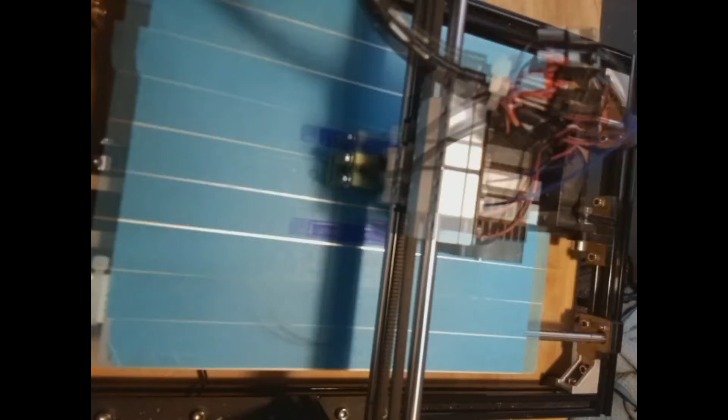This first one, we're going to make a strain relief for that cable coming into the connector on the bottom left hand corner of the heated bed. Had a bit of a mishap after months of use, where one of the red cables went into that block, and it actually snapped off, so this is hopefully going to sort that problem out.

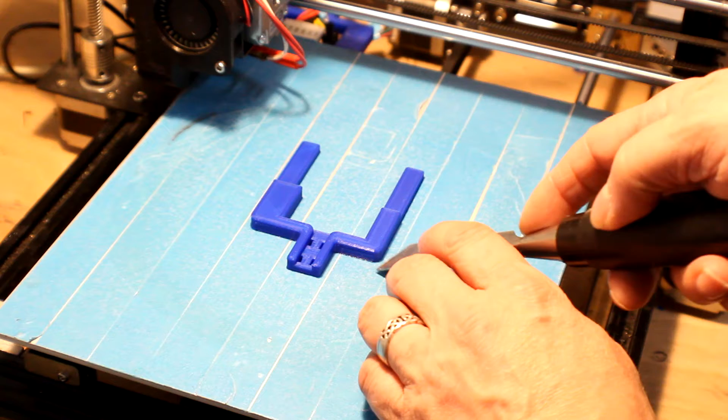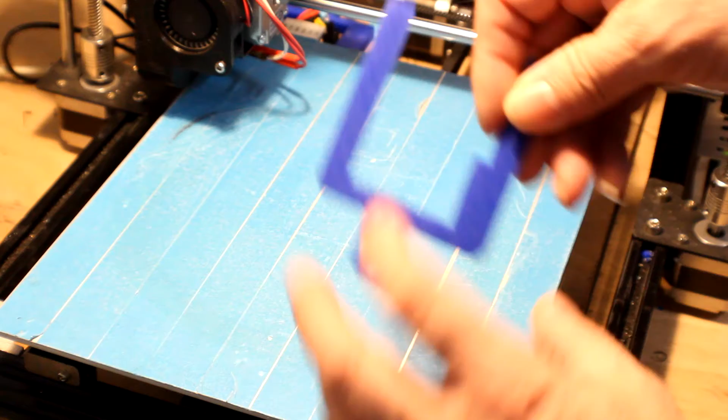Okay, there we are. This one there. We'll super glue these edges and just move that over. That'll go there, but on the other side where the cable is. So let's just get that done.

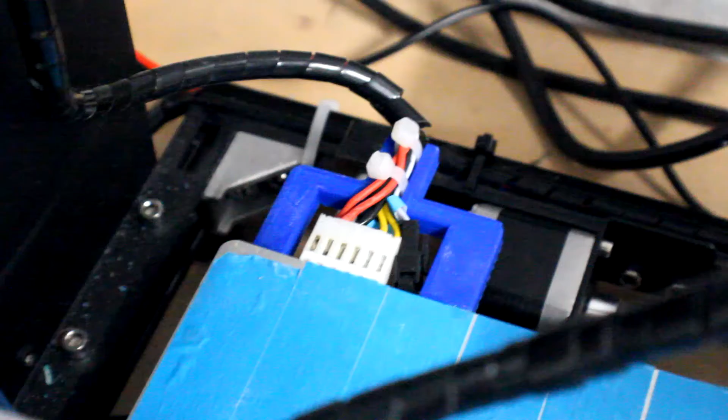Right, so I've got that fitted. I have to use a couple of clamps just to hold this onto the bottom of the heated bed whilst the super glue set, and use cable ties there, which means the tension is now on the other side of those rather than at this joint here, so we shouldn't get any more cables coming loose on that connector, which is good news. There we are, another successful print.

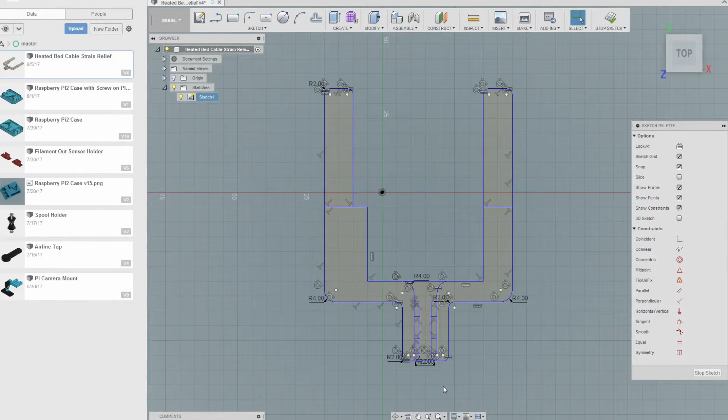So as I've worked on this, I've also been thinking about the various extrusion levels I'll need, and I've segmented up the diagram so I can achieve that. These areas here will essentially be glued underneath the bed. This area here will be the main strain bearing component, and then we need a channel for our cable in this area, and two slots on each side of this channel so we can put a zip tie through to zip tie the cable.

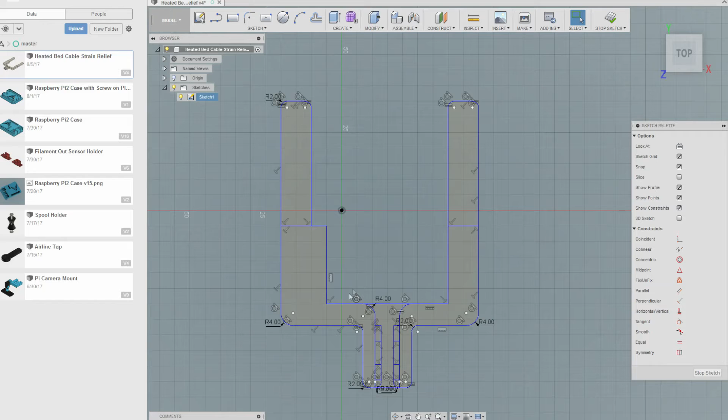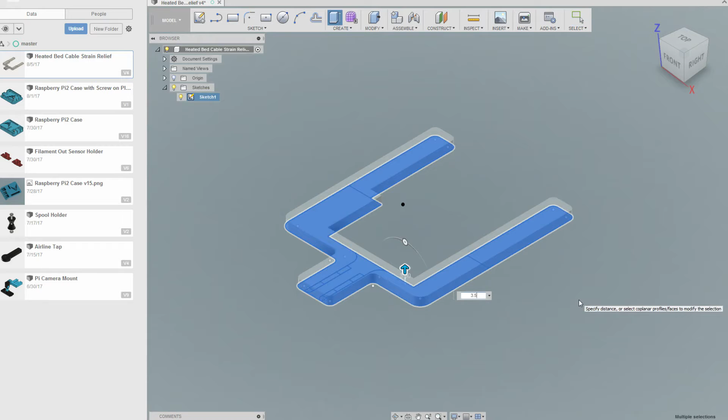I've measured the connector block which fits into this area, and there's also one of the limit switch connectors that also needs to fit into this area. Okay, so we'll stop the sketch and then start extruding. Let's move that into an isometric view. So the first thing we're going to do is select everything and extrude the whole thing by 3.5mm. That should give us a nice platform to work from.

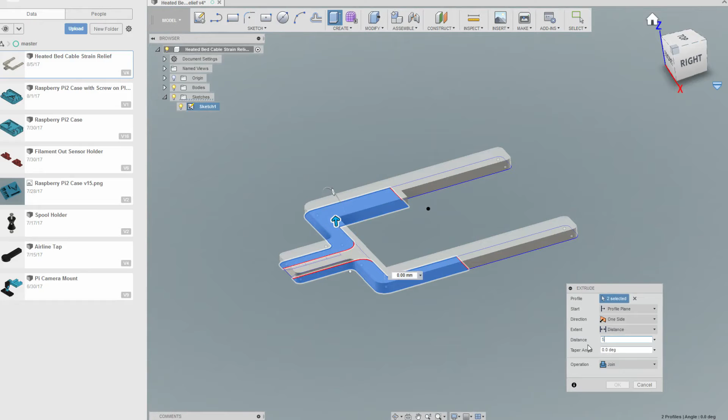Then we need to extrude these areas here, a couple of mil higher, so I'll make them 5.5. Let's do that now. Now it wants to create a new body, but I'm not going to do that. I'm going to do a join, and if we do 5.5mm, that'll bring that up nicely. It leaves a little channel in the middle here.

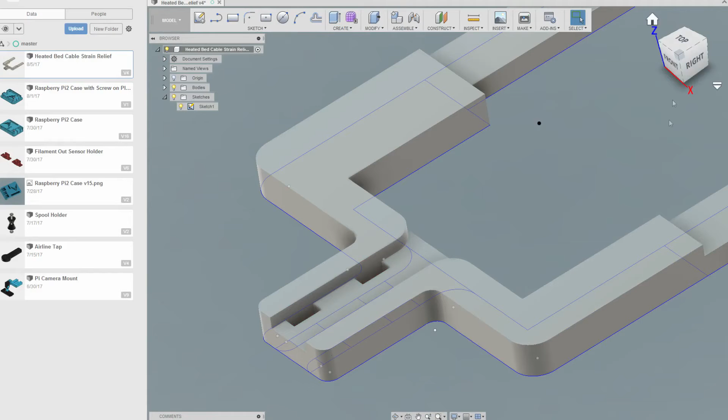The last major body work we need to do is extrude these 4 slots all the way through. So if we select, say, 6mm, that's already changed to a cut. So just do that, and there we've got slots in place that we can put cable ties to and cable the connector block bundle of wires into this channel, and therefore the strain will be over in this area on the cable, rather than where it's going into the cable block connector and the crimps behind that.

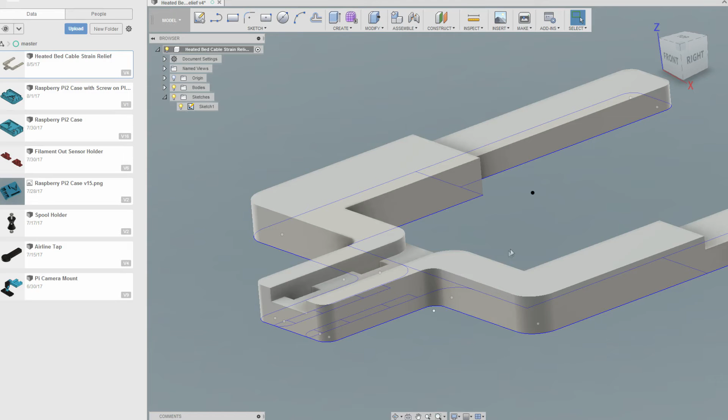Okay, then I think all we need to do now is put some fillets, so we can round out some of these corners. Press the F key, choose some of these edges, so I think we'll fillet all of those edges.

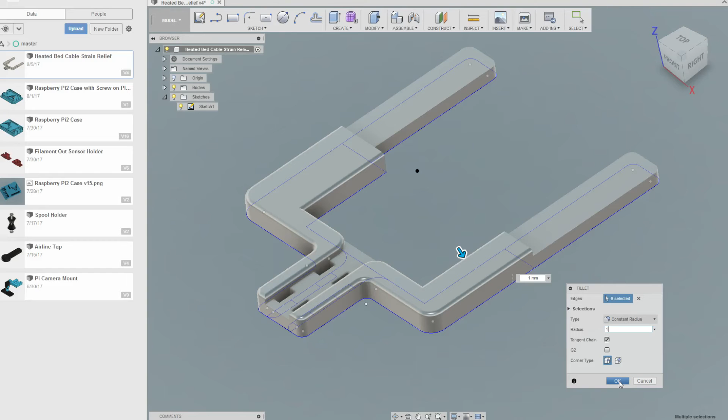Actually, we won't do that one, and we won't do that one, because this is going to be flush up against the plate, so the build plate will be in this area. I think we'll just try a 1mm fillet, that should be nice enough. Click on OK, and we'll see if we can fillet this area here, because we don't want any sharp edges where the actual cables are running. So let's try that one and that one. Do a 1mm. Oh yeah, that's nice.

And I might do that one there as well if we can. There we go. Possibly. Oh no, we can't do a 1mm fillet on there. We'll just use a 0.5mm one, that should be sufficient.

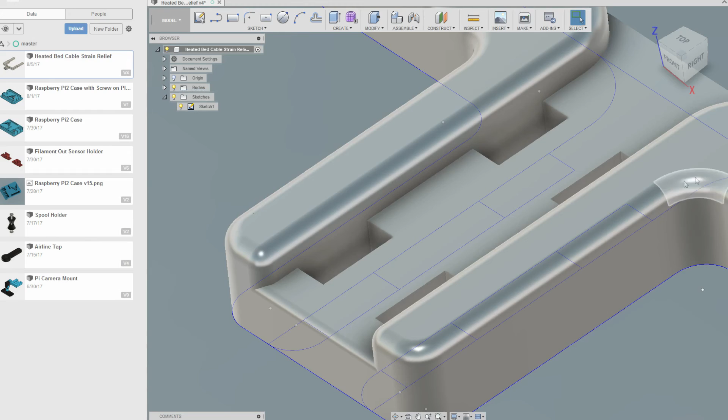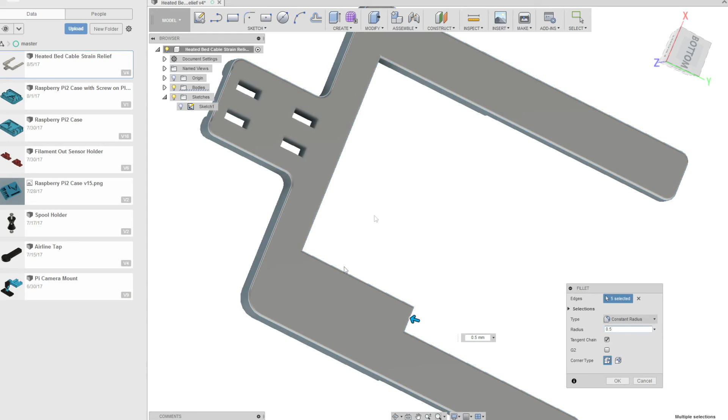Okay, on the underside, I think I'm going to fillet round the whole area. Let's turn that sketch off now. Press F again. Fillet, fillet, fillet all around there. If we use a 1mm, no, it's not going to allow us to do that. Let's choose that as well. 0.5, yes, 0.5 it'll let us do, just to soften that area out.

And that's basically our strain relief bracket. Okay, as normal, we'll click on Make, click the object, click on OK, wait for Cura to load.

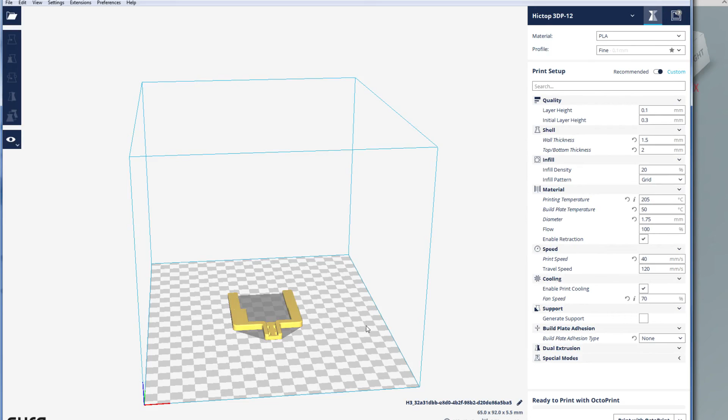There we go, and this one's a fairly easy object to 3D print because it's all completely flat on the bottom. So we don't actually need to do anything here other than save it to a file and send it off to the printer.

So there we go, and you saw that printing out earlier in the installation. That's that object done for this bit of 3D printer upgrading, and there'll be a few more of these coming. So thanks for watching, and I'll catch you on the next video.